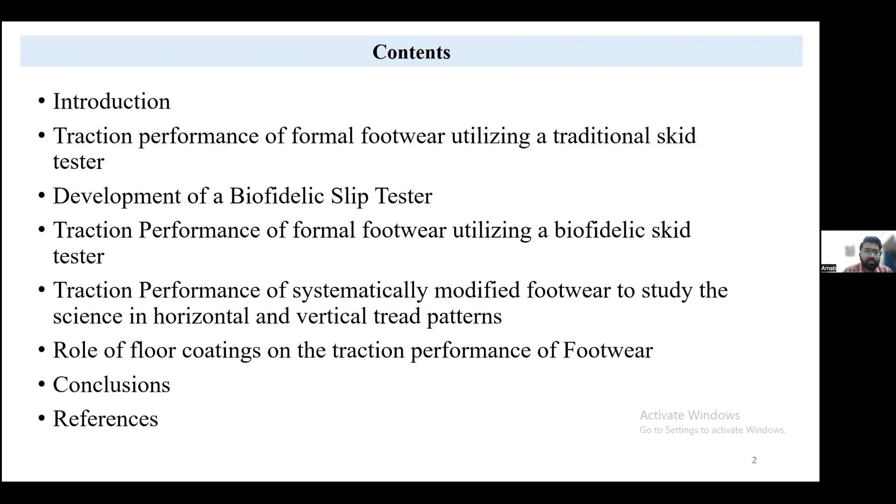So what is meant by the term slipping? Slipping essentially occurs when there is too little friction between the footwear or the foot and the floor. If you are barefoot, it's the foot and the floor, and if you're wearing footwear, it's the footwear and the floor. Typically when the amount of friction goes below a certain value or limit, you tend to slip. The person's heel on the front foot slips forward, causing the person to fall backwards.

If you look at the diagram on the left, this is your initial stepping in. You're going to technically step on a puddle of fluid, like water or some kind of cleaning liquid left behind by the cleaning staff, or there's some slippery flooring, and your foot begins to slide. Finally you lose control, the foot accelerates, and due to discrepancies of the two feet, you tend to fall. This fall can lead to several implications like fracture and back pain. This is very common for the elderly population compared to younger people, because we have better control over our body, but it diminishes as you age.

So slip and fall is a very common occurrence. I'm sure all of us have at least slipped, if not fallen down, and there are instances where we've fallen down at least a few times a year due to very slippery floorings in your institute or somewhere else.

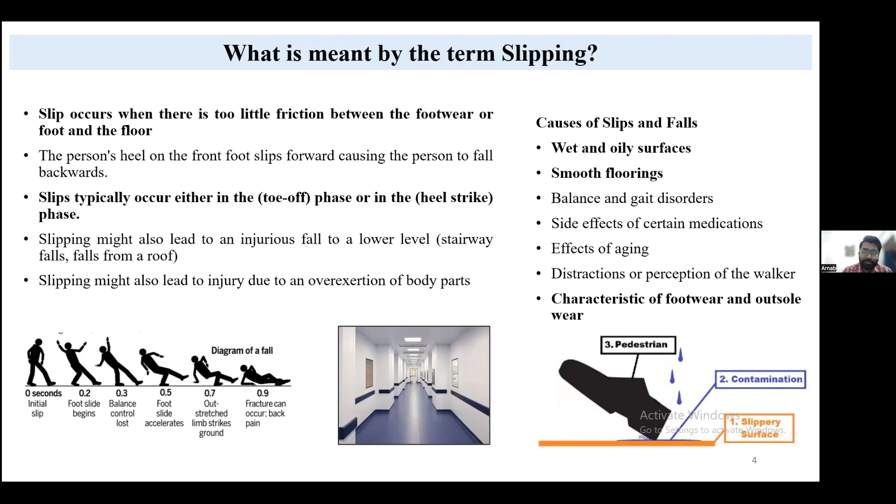Essentially, there are three things of concern from a physics standpoint: you have the footwear, a contaminant in between, and a slippery surface. It could be slippery or non-slippery, and due to the contaminant, it becomes slippery. It's a complex and nonlinear interaction between these three materials. The surface is a hard material, the contaminant is a fluid material, and the shoe sole, the bottom of your shoe, is typically a soft, deformable material. So you have a soft-hard material interaction with a fluid in between - that's the physics we are trying to study.

Let's have a quick glimpse at the worldwide statistics of slipping. Each year, roughly 700,000 to 1 million patient falls occur in US hospitals - a very common statistic - resulting in around 250,000 injuries and up to 11,000 deaths. We usually go by US statistics because it's commonly reported, but even in India the scenario is the same, and in the UK there are also huge amounts of slips and falls.

We specifically put hospitals here because we started pilot testing in the hospital. We are jointly affiliated with AIIMS, so that's why we started testing at different corridors and floorings there. But this is also a problem in offices, hotels, and shop floors.

Like on a shop floor, where you have heavy manufacturing industry with a lot of grease and oils falling, formal footwear may slip and fall. Slips, trips, and falls are the second most common cause of both fatal and non-fatal work-related injuries in the United States, leading to significant workers' compensation claims.

What is this workers' compensation claim? This is also getting more common in India. Typically, if you fall or get injured at work, the company you work for is supposed to pay you a huge lump sum as settlement for not having the right safety conditions. This is known as US workers' compensation, and it's getting very common in multinational, US-based, or Europe-based companies in India as well. If somebody gets injured at work due to unsafe workplaces, the company needs to pay a hefty lump sum, which can go to millions of dollars in settlements.

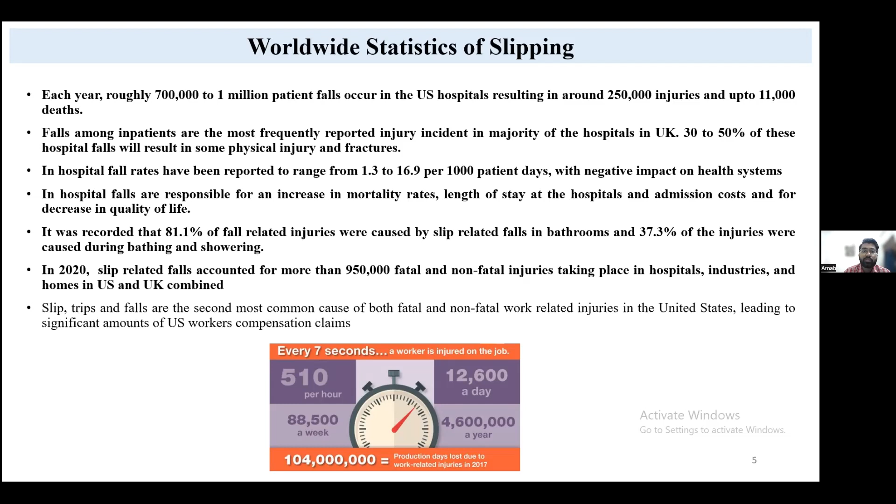A lot of law firms are also interested in having a very safe environment for workers, which is why the slip and fall issue becomes even more important. Besides injury and possible deaths, it is also monetarily draining for a lot of companies. That's why world statistics point towards the importance of doing more slip and fall studies on footwear.

So let's look a little bit into the biomechanics of slips. Typically what happens is you basically place your foot at a certain angle while stepping, and then there is a reduction in friction between the foot and the ground, the footwear and the ground specifically.

Then you either encounter a micro slip, where a person doesn't really detect the slipping motion but gets a little push or acceleration to their footwear mid-slip, and can still recover from it, or you have a macro slip which you cannot recover from, which leads to a possible fall, or you could hit your head or get injured.

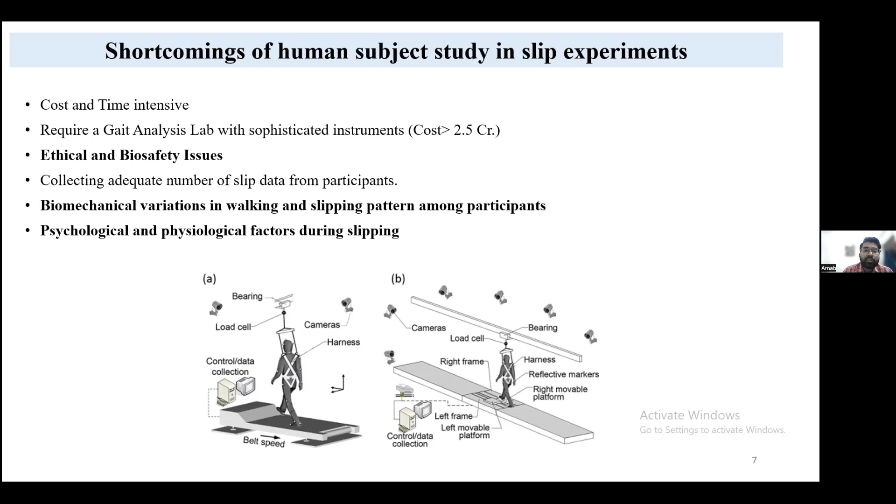That's why human slipping studies are extremely cost-intensive, and they are not very often considered as an industry standard for studying footwear traction.

So the next best thing is to develop a mechanical slip testing device. This has happened historically, it's not something we developed, but mechanical slip testing devices have been around. What they do is typically simulate the biomechanics of your foot.

If you look at this device on the left, these are vertical motors which apply a vertical ground reaction force similar to the weight of your body. So let's say if I weigh 60 kilograms, this is going to place around 30 kilograms on one foot. You can place any kind of floor coating or flooring underneath, with a force platform underneath, and the shoe can be adjusted at different angles. There's an angle adjustment setup and it can also be moved horizontally, so you can replicate the entire biomechanics while walking and about to hit a possible slip.

So that is being replicated, and during that replication the force plate measures the shear and the normal force, and the ratio of that over a dynamical range of 200 milliseconds will give you the coefficient of friction. So with this existing device, there is still a range of problems which remain.

One of the key problems is testing the biofidelity. Biofidelity means actually replicating the biomechanics of a foot. Even though these devices are able to replicate some biomechanics of the foot, the different motions still need to happen together. While I'm about to slip, I'm not only placing my foot underneath, I'm also trying to move horizontally. So simulating all this biomechanics in one portion is very important to get the right material characterization for the shoe and floor.

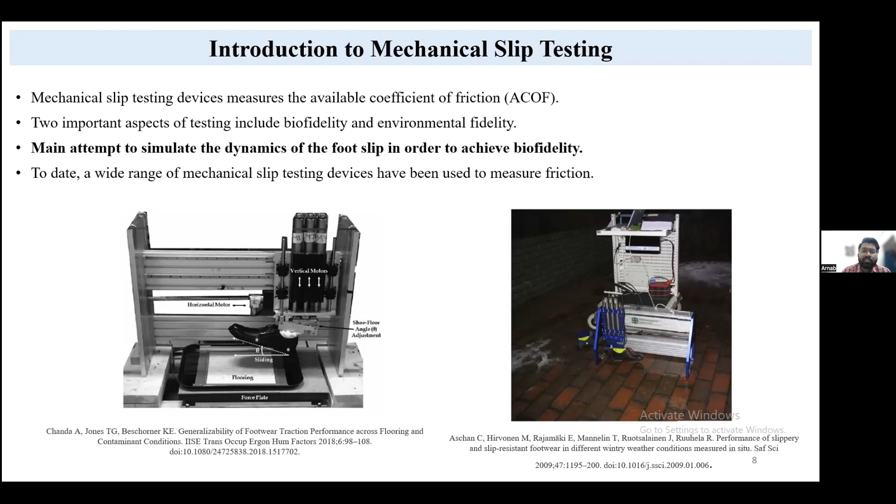So a wide range of mechanical slip testing devices have been used to measure friction, but they still lack in terms of their accessibility or usability in middle income countries such as India or the Middle East and other places where these are not widely accessible. These are mainly done in the US and Europe.

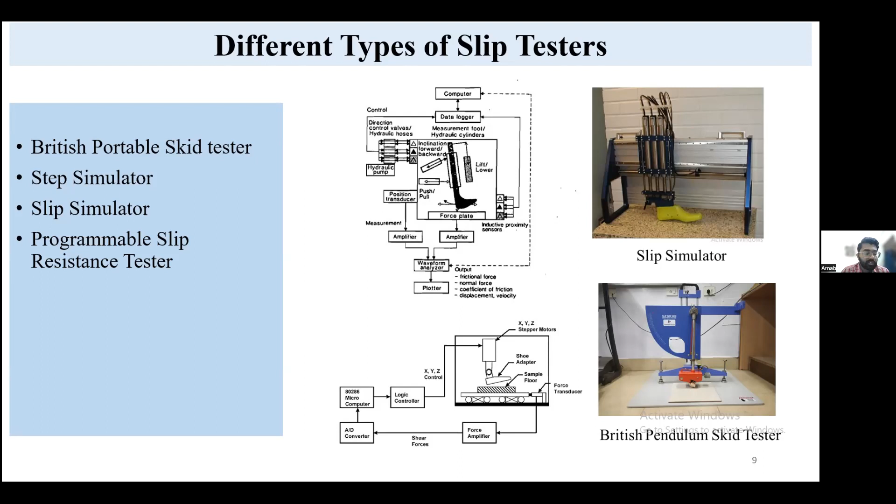So there is one or the other discrepancy with all the slip testing devices. That's the summary - even though they are very complexly built, they are not solving the overall purpose of biofidelity and environmental fidelity. That being said, I'm going to talk about the traction performance with the skid tester. Very briefly, that's what has been covered so far.

Taylor et al. is one of the major groups, at the University of Pittsburgh, where they basically do a lot of footwear testing using two different slip testers as well as human slipping studies. I'm going to skip over the details, but just summarize the points. A few things found to be important: the footwear treads or bottom pattern become really important in imparting a certain amount of friction necessary for the footwear and the floor. One of the key drivers to that is not only the design of the treads, but also the contact area.

Another important component is the heel width, because when you're about to slip, you're basically hitting the ground with the heel. So the structural components of the heel width and how the heel is built is of primary concern. Also the hardness of the heel material matters. If it's a super hard, high shore hardness PU, that's a different material than a low shore hardness PU, which can deform. These factors affect footwear and flooring friction a lot.

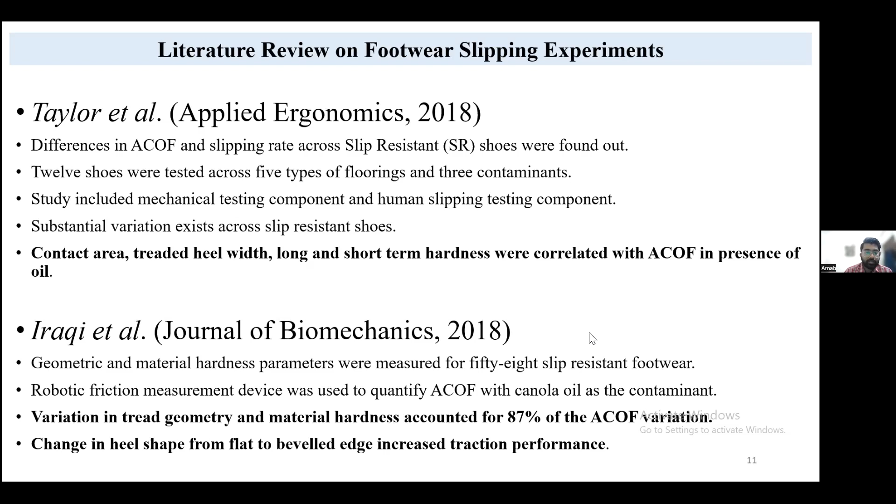Let's go further. There are some works from our group where, rather than testing the same footwear on 10 different floorings, we wanted to find some generalizable values - saying that these 10 floorings, or this group of three floorings, behave similarly for a certain footwear. So we did a generalizability study.

There has been a lot of shoe testing. We have tested more than 600 pairs of shoes in the US. Currently we are building several devices and working in India at IIT Delhi, specifically on around 200 pairs of shoes, doing massive testing for different populations like the clinical population, the hotel population, and others.

I'm going to skip over this literature review, but a few things of real importance: the dynamics of the heel also has a significant effect on slip resistance - this is the biofidelity component. So how the slip dynamics work, what is the velocity of a slip, what is the angle of a slip, as well as what load is being offered, has a huge implication on the slip outcome or final traction value. If a device is not applying the right load, right angle, and right speed of slipping, it's going to give an incorrect value. That's biofidelity. Second is the right flooring - that's environmental fidelity. These are the two things which are currently a research gap.

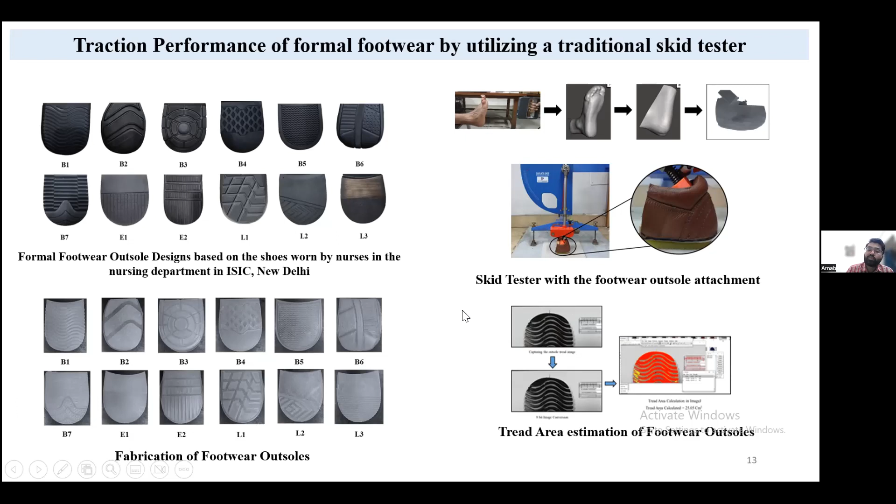This is using the skid tester. I'll quickly go over the results. Here we have tested different kinds of footwear heels. We took an imprint of that and remade it. We created a foot model using 3D scanning and attached a shoe cutout with the sole, placing the specific sole underneath to test the effect of the overall foot, because we wanted not just the swing motion but also the effect of the foot's shape. So we have a foot simulant with the footwear out, with the particular sole, and through imaging we've also looked at the tread area in contact - we put a small colored imprint to see which tread area is in contact during this interaction.

So here we have come out with some ACOF values, where we looked at different tiles - matte tile, glossy tile, anti-skid tile. We can say glossy tile has the lowest coefficient of friction, matte tile is medium, and anti-skid is usually very high friction. We specifically tested different shoe patterns - B1 to L3 are the different shoe patterns across the different tiles. These are the three different verticals you're seeing here, and we have seen several ACOF values.

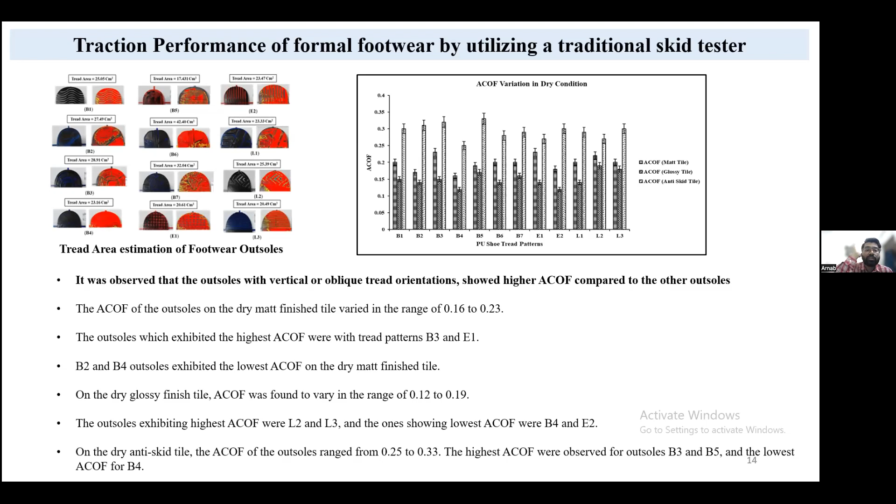The key highlight observed was that the outsole's vertical and oblique tread orientations showed higher coefficient of friction compared to other outsoles. So one key finding: if the treads point towards your direction of walking, they have a high friction value. Also, treads that are a little oblique, like at 15 or 20 degrees facing towards your direction of walking, also have high friction, as compared to treads which are completely horizontal. So if you check your footwear and see horizontal treads, you may have lower friction than if you have vertical treads pointing towards the direction of walking. This was a very interesting find.

Another finding: the coefficient of friction of outsoles had a maximum reduction of around 62% across all the tiles in the presence of Lizol, a very common cleaning liquid. In dry slipping conditions, slip is very unlikely. Even with water, sometimes most footwear does not slip. But when you change that with some kind of cleaning liquid like Lizol, there is a huge chance of slip. That's what we observed in the Lizol condition.

Some other findings: the ACOF of the shoes further reduced up to 50% on all floorings with liquid soap as a contaminant. So any kind of soapy liquid like soaps, shampoos, or Lizol solution, which has high viscosity, will lead to a very high chance of slips and falls and a very low traction value.

One thing to note here - you're looking at coefficient of friction values, what's good and bad. Typically from industry standards, which we have also contributed to, we found that if the coefficient of friction value is below 0.3, you have a high chance of slipping. That's a very common standard.

There's a quick question: the analysis is for walking conditions - how will this change for running and sports? That's a very good question. Basically, how this changes for running and sport is that the loading will be different, because in running you're applying a different kind of loading and the angle of the shoe also changes. While brisk walking, the angle would be much lower with the ground, while running, the angle changes. So the angle and the force will change, and also the speed at which your shoe accelerates will have an impact. If you change these three biomechanical parameters, the testing results will also change. Hopefully that partially answers the question. These are some parameters which change from walking to running, but typically we don't measure for running because we haven't gotten into the sports shoe regime yet. That's the next big thing in our pipeline, part of future work, where we'll get into all kinds of sports and athletic shoes where slipping and falling have different implications. There you're not only looking at translational friction, but could also have rotational friction where your foot completely twists. That's a bit different regime we'd look at in future.

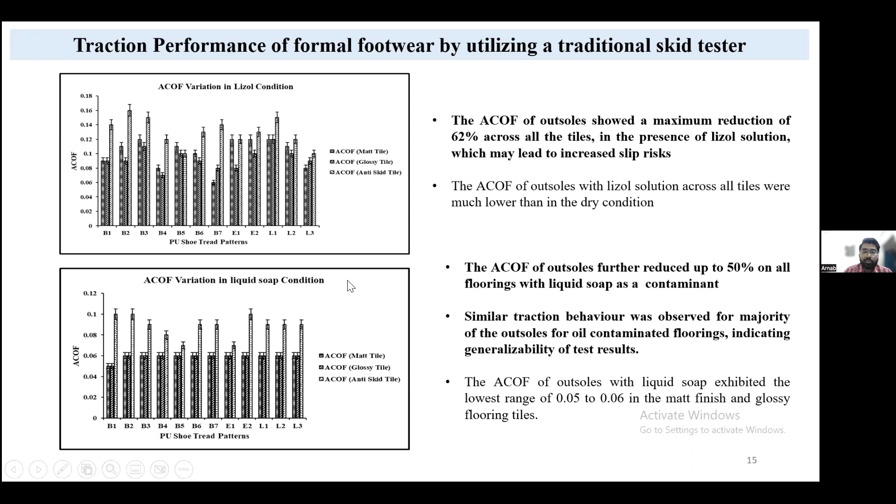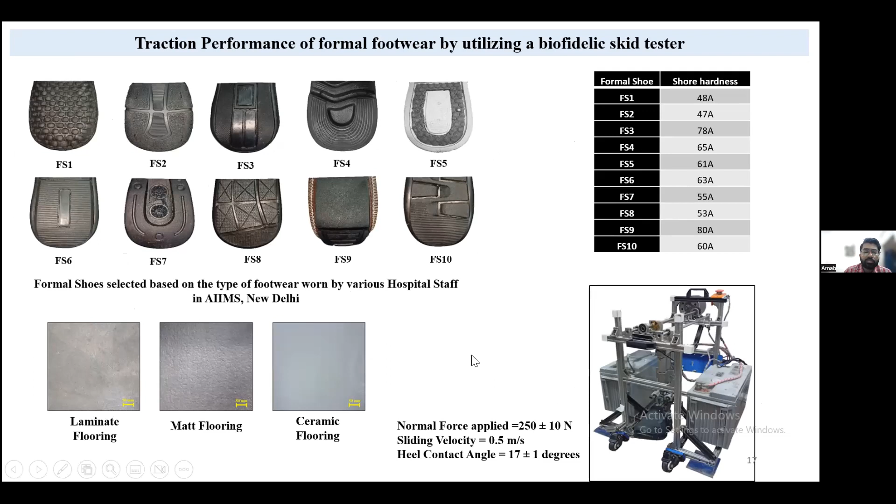So going further, these are some further results where we looked at the vertical and oblique tread patterns, which I've already highlighted. Let's move into the next slide where we talk about the biofidelic skid tester which we have developed. This is a very advanced device.

This is currently filed for patent, developed in IIT Delhi. The key importance of this work is that this device is portable. You can take it anywhere. It has rollers, so I can take this device to your particular lab, any shop floor, any industry, any hotel kitchen.

This has load cells rather than a force plate. I have a series of two load cells, one horizontal and one vertical. I have the angle adjustment set up, and I can place any shoe here and test it within less than 10 or 15 seconds. Adjustment usually takes around 30 seconds to a minute, and then on a display it gives you the average coefficient of friction.

So this is a very advanced device, or robot, which we have built in our lab, and it conforms to the ASTM F2913 standard. This is the footwear traction testing standard. This is very important—if we do not comply with the standard, the device is of no use. So these dimensions are very stringent.

These are all measured in meters, and the horizontal speed is usually around 0.5 meters per second—that's the speed of sliding. The maximum displacement is around 30 centimeters. The vertical forces this device can apply range from 0 to 500 newtons.

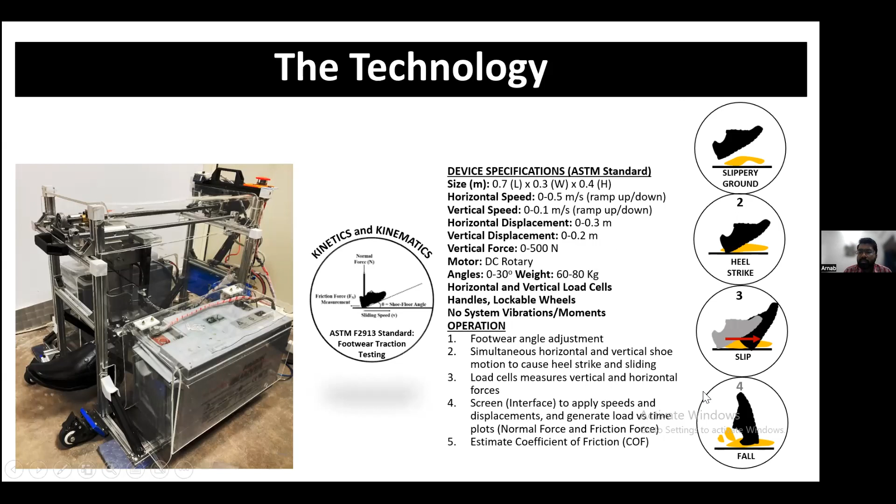I know the time is limited, so I'm just going to quickly go over some of the results and wrap it up. These are the four steps this device is going to take us through. This is some advanced study we are doing.

We are testing a lot of different generalized shoe patterns. We are looking at Bata, Khadims, and several other standard brands like Hush Puppies, picking up a few shoes like formal ones, and trying to characterize the shoe-floor friction. In the future, our goal is to have a complete website detailing how much friction each shoe has on very slippery flooring versus normal flooring, which will hopefully help the public select footwear based on slipping potential.

For us it may or may not be important, but for companies bulk buying formal footwear for workers or nurses, this would be of increasing importance. They can quickly check this chart and see that a footwear has a frictional value less than 0.3, meaning it's most likely to cause high slips and falls. So this is our future work.

This is a snapshot of a CFD-based study, a computational fluid dynamics study where we look at contaminant flow patterns while the shoe is sliding. This is a fluid-structure interaction study where we looked at the footwear being pushed by the floor while the flooring is stationary, and fluid flows through—how fluids come out, what the mass flow rate is, and what the fluid pressure is. There's a huge implication of fluid pressure on friction: high fluid pressure basically means lower friction.

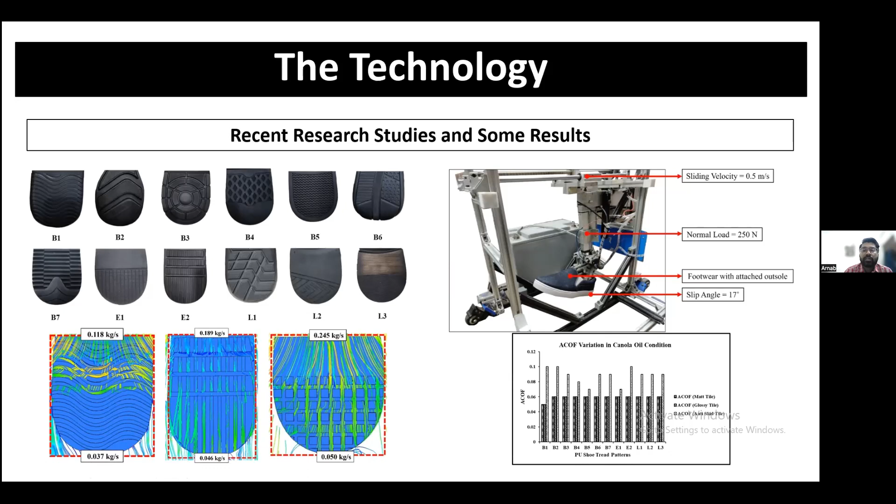If we look at very horizontal treads, the entire fluid is not able to come out. From a tribological standpoint, if the fluid cannot flow, the amount of friction goes down; if the fluid is completely able to flow, the friction goes up. That's the science behind it. That's why vertical tread patterns facing the direction of walking show much higher friction, while horizontal patterns show much lower friction, giving a high chance of slipping. So next time, watch out for the shoes you're wearing.

We are also looking at this from a marketing standpoint, since I'm interested in entrepreneurship as well. We looked at the entire footwear market, and there are injury lawyers who charge millions of dollars for workers' compensation cases.

This is a comparison of all the devices in the market right now, going from James device to the Satra STM 603, which is the most closest device to our device, but it is still not portable. So it doesn't have all the sliding speeds, so the first three conditions - forces, sliding speeds, and shoe angles - conform to the biofidelity. It can test the whole shoe.

This is also very important. Do you have a shoe cutout, or just a small piece of the sole, versus the entire shoe? The entire shoe is much more biofidelic.

Then there are other parameters which basically make sure they conform to the standards. If you look at the cost overall, average cost is 20 to 30 lakhs for any device in the market, and again, they're not portable. Our solution was built for less than 2 lakhs. So we are trying to sell this through a tech transfer for more than 10 lakhs, and hopefully through a possible startup channel.

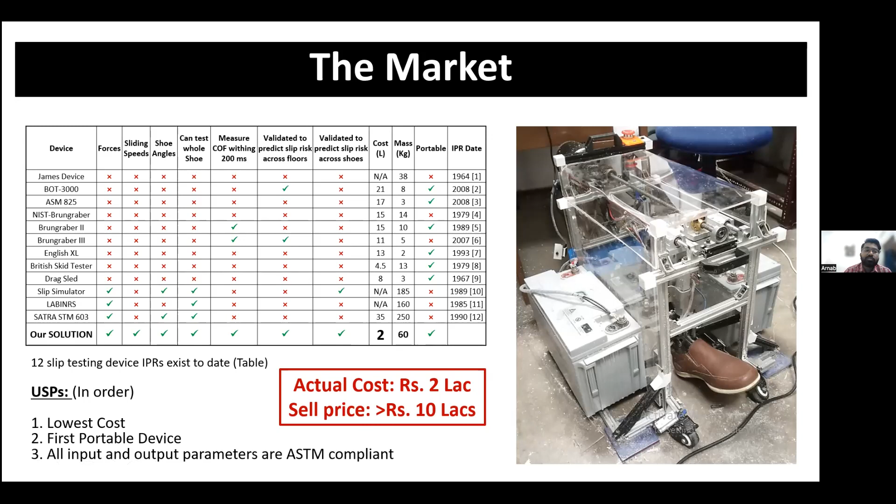So a few of the key USPs of our product include the lowest cost. This is the first portable device in the market, and all the input and output parameters are ASTM standard compliant. This is not the case with other devices which are out there.

So I'm going to talk a little bit about this, very briefly. Across all the shoes tested, some of the important key features of a new testing device is it should be able to clearly differentiate between two different shoes on the same flooring and same contaminant condition. It should be able to differentiate between two different floorings given the same shoe and same contaminant condition. Again, it should be able to differentiate between two different contaminants with the same flooring and same shoe. So it should be able to distinguish between floorings, contaminants, and shoes independently, as well as when they're in combination.

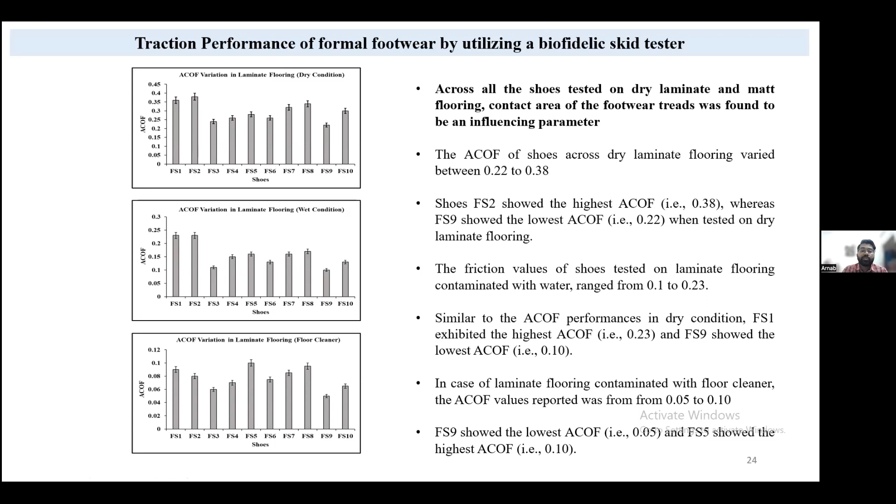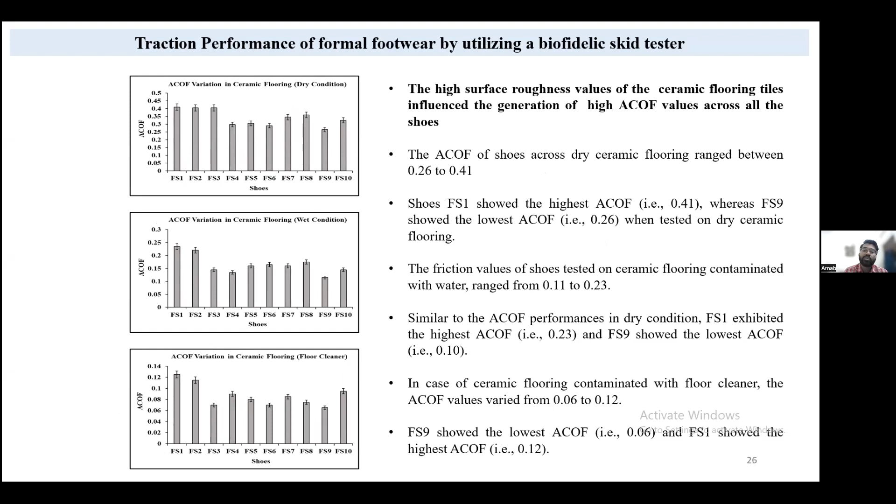So all these tests were being conducted. I'm just going to skip over the test results in the interest of time, but this is what these tests are about - we are trying to see if the slip tester is able to distinguish all this. For higher friction shoes, or very high traction shoes, is it showing high traction, or is it showing a false value? So a lot of these repeatability tests are important. The same shoe has to be tested at least 5 times to make sure what is the average value.

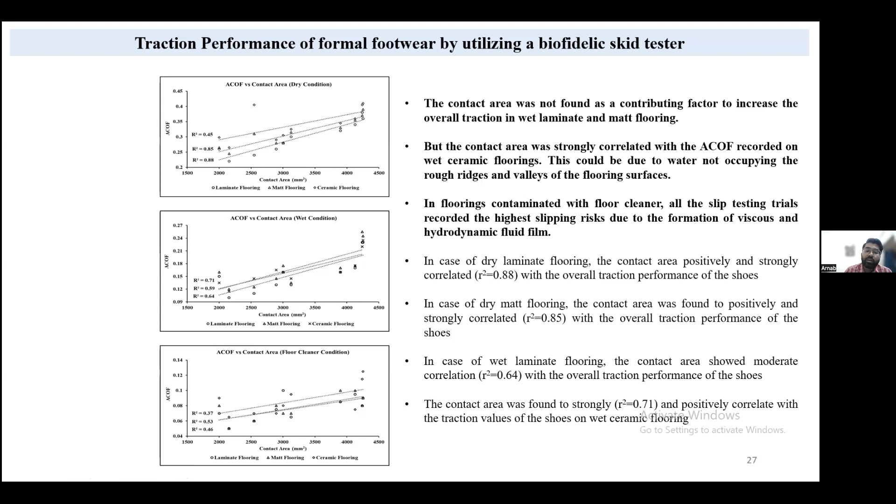So these are some test results. We are also running some correlations - if you look at the first figure here, we are looking at coefficient of friction versus contact area, and we see a very high correlation. The overall contact area means the bottom part of your footwear which is touching the ground, the bottom part of your tread pattern. If the contact area is very high, usually the coefficient of friction is fairly high.

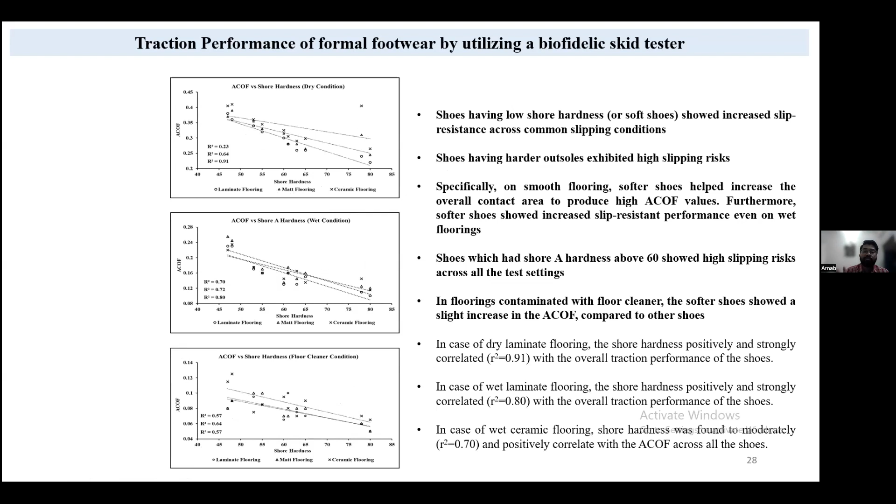Shore hardness - if the hardness of your shoe is very high, then usually your slipping chances are much higher, as the coefficient of friction is low. So you need to have a soft material with a high contact area and possibly vertical treads. So these are some key findings from these studies on formal footwear, which we can use in future work.

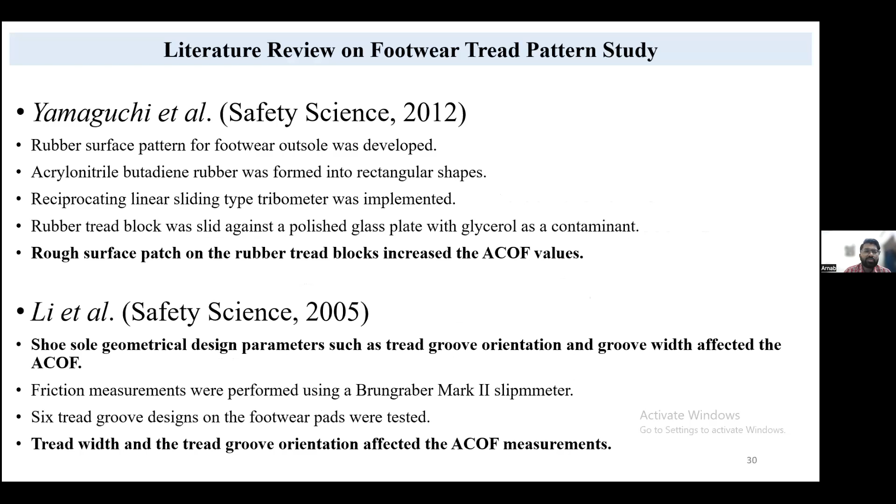We also wanted to understand the science of footwear by systematically modifying the footwear. I'm going to skip over the literature - very few studies have systematically modified the footwear. What do we mean by systematically modified? We focused on horizontal treads and created different tread depths and tread sizes. All these treads are artificially built in different widths and different channel depths and channel widths. With different combinations, we did a parametric study to understand the effect.

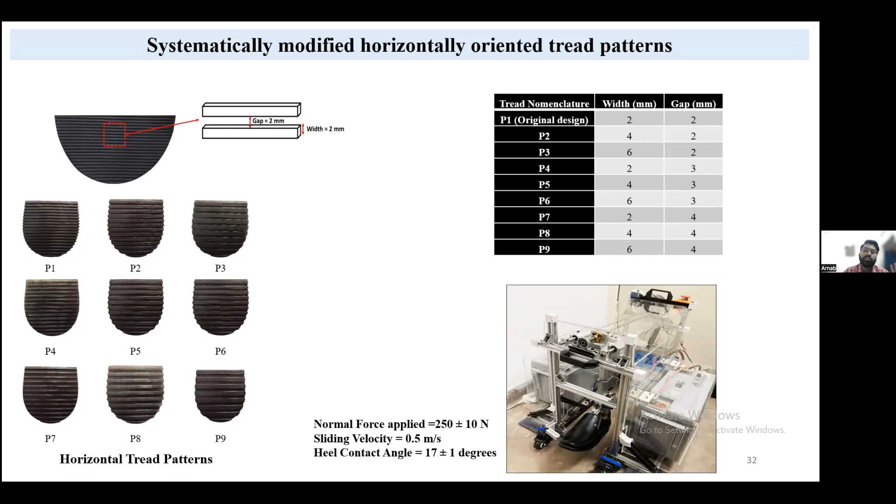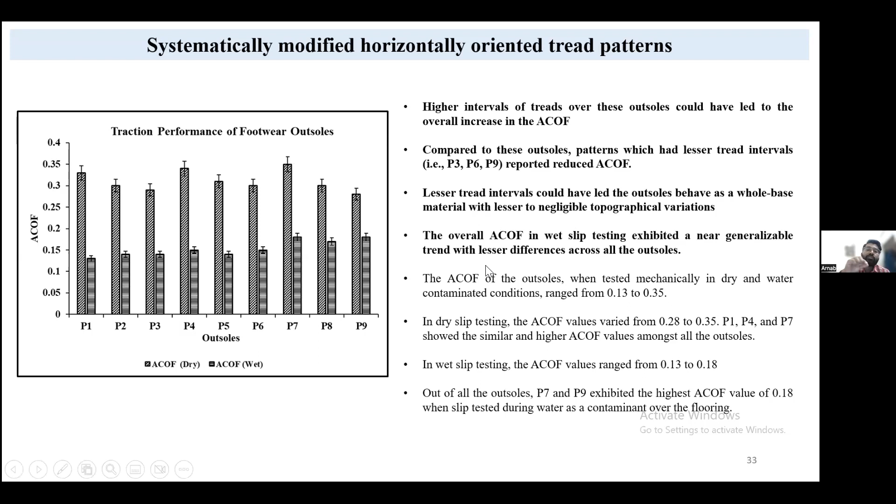Now, let's say we have horizontal treads on our footwear - what horizontal pattern is good, what is bad? That is what we wanted to find through studying the science. We did find that certain higher intervals of treads on these outsoles could lead to an overall increase in the ACOF. Typically for horizontal footwear treads, to give you the summary, we did not find a huge amount of difference - most horizontal footwear treads are equally bad. They will cause your footwear to have a low amount of friction and high chances of slipping. So the overall ACOF in wet slip testing exhibited a near generalizable trend - the horizontal tread pattern doesn't matter much, whether the interval of the tread is very high or the tread gap is very low.

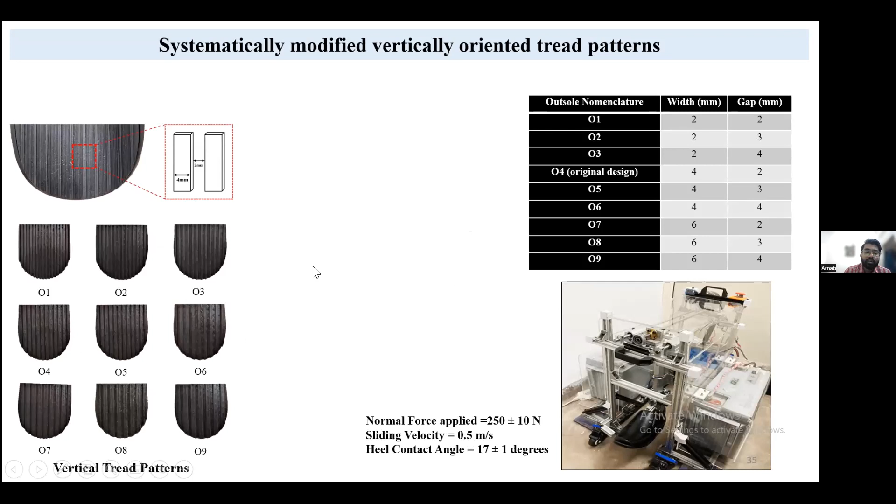So this is a very important finding. We did the same for vertical treads as well, and found there is a huge implication. We saw that outsoles, this is due to increase in contact area and drainage channels. We are calling this the drainage channel. The more drainage of fluid you can have, the higher the friction of your particular shoe. So basically, if you have wider channels, you will have much higher friction. Next time when you go to purchase footwear and you're interested in slips and falls, please look out for these features. That's one of the key takeaways.

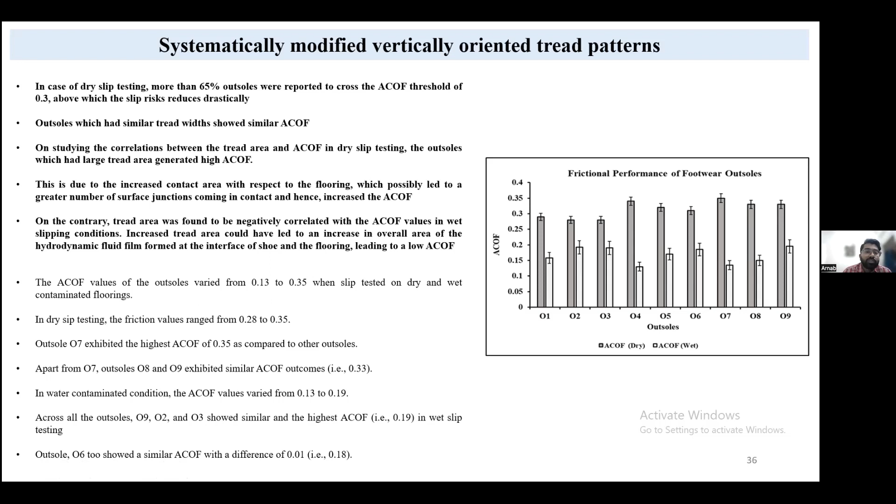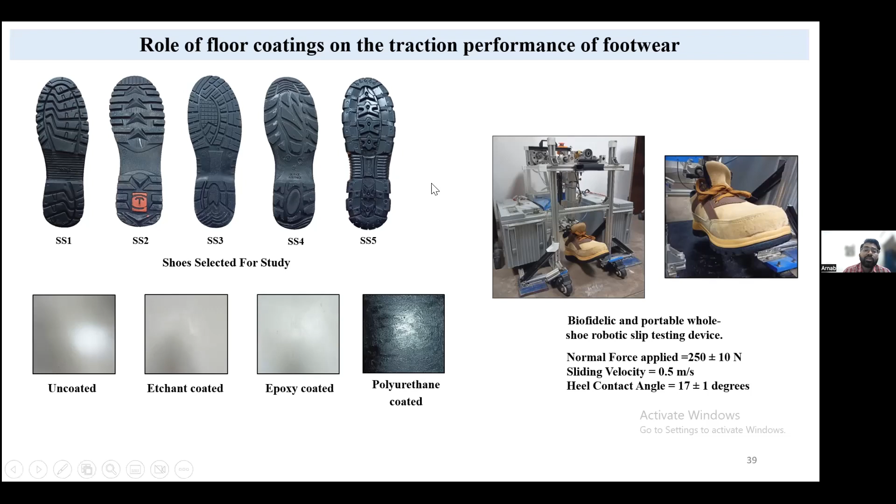I'm skipping over time, so I'll just quickly go over. The last thing which we did was a coating study. We wanted to see, can we modify a particular flooring with certain common coatings like etchant coating, epoxy coating, polyurethane coating, and we selected some very high traction boots for this study.

Some of the key things we found were there is a key difference between the different floorings. Slip testing experiments across dry, wet and floor cleaning solutions on uncoated laminate floor of course has a high slip risk, with an ACOF of less than 0.3. Floor coated with etchant showed significant increase in shoe floor friction. So this is giving an answer to one of the questions earlier.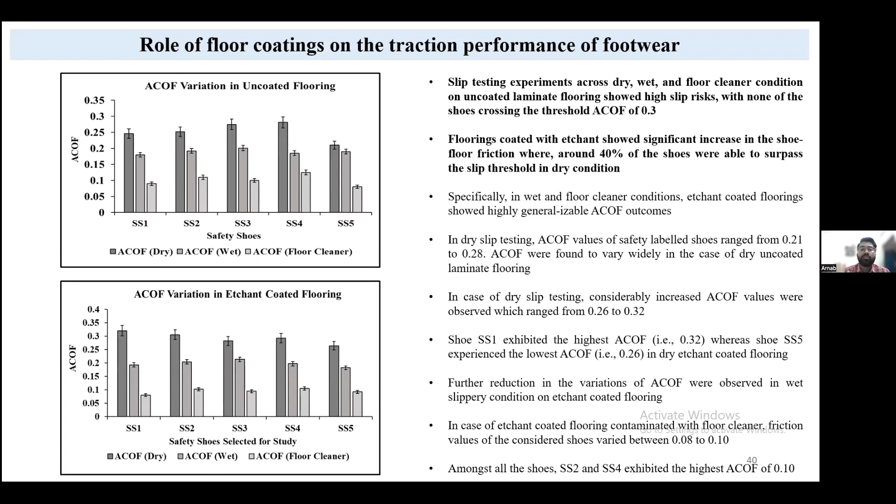With this particular coating, we are changing the characteristics of the particular floor, and this change is going to affect the overall friction, right? Floorings coated with epoxy paint showed good slip resistance performance, as all shoes were able to cross the threshold of 0.3. So epoxy paint was also pretty good for most of these slippery floorings. Floorings with thick polyurethane coating also observed high slip resistance performance. So basically, we did a comparison study.

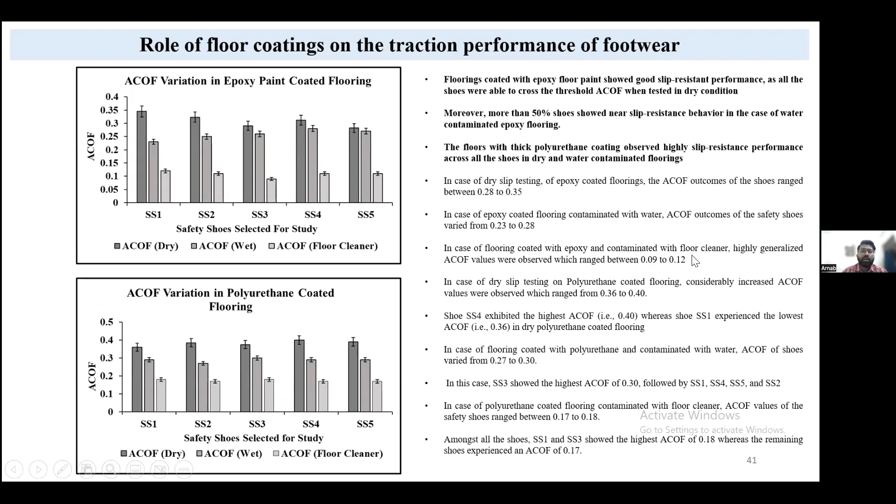So that's it. To overall conclude, we discussed some slip testing methods. We did some literature review on slip testers, and based on that, we conducted some initial tests with a traditional skid testing device. Then, based on the gaps of biofidelity and environmental fidelity, we developed a novel biofidelic portable testing device, which is the first of its kind ever in the country and across the world.

We are trying to make this into a startup, and we are also interested in collaborations where somebody is interested in shoe testing, with shoe manufacturers as well as researchers. We have tested a lot of standard formal shoe testing conducted in AIIMS Hospital, and done a lot with clinical population nurses. Next, we are trying to look at some restaurant workers, like the chefs and cooks who wear the same kind of footwear, and we'll also be focusing on industry, and we are interested in offices.

Then we started to understand the effect of tread patterns or treads on friction, and what is the science behind it. We have come out with several scientific findings, such as a soft insole is usually good, soft outsole is usually good, so the hardness of the outsole should not be very high. The tread pattern should typically be vertical, and the contact area of the tread pattern has to be very high, and typical vertical with a higher tread channel gap or tread channel width is going to give high friction to the footwear. These are some of the scientific findings, and we are doing some follow-up computational fluid dynamics studies to understand in depth the science.

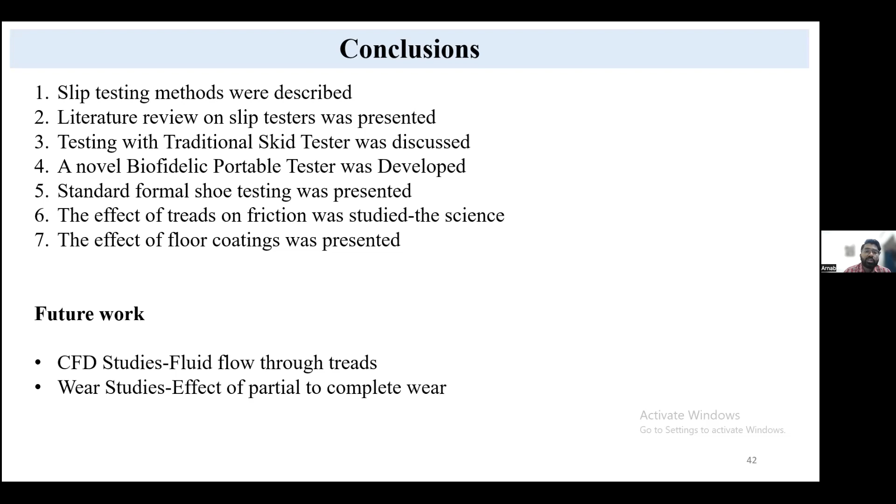So this is just a conclusion and future work, and there are some references, and that's it. Thank you.